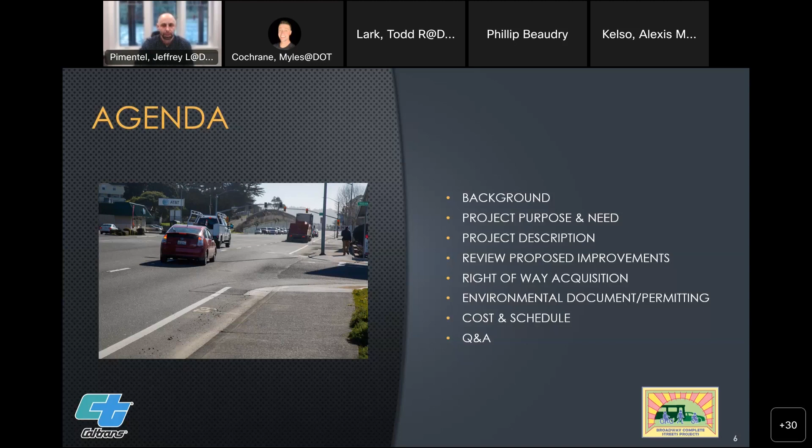In terms of background, back in early 2021, through a partnering effort with Humboldt County Association of Governments, City of Eureka, and Caltrans, a Eureka Broadway multimodal corridor plan was developed, and a number of concepts and ideas came out of that in terms of ways to enhance and increase multimodal connectivity, safety, reduce congestion, and create a sense of place in the City of Eureka. The improvements you're going to see here shortly as part of the South Broadway Complete Streets project are a byproduct that fell out of a lot of the ideas and concepts from that study.

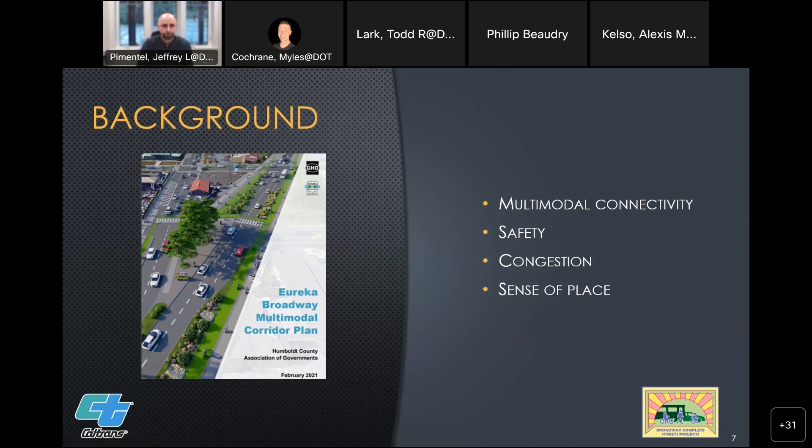With that, the project purpose: to increase pedestrian and bicyclist safety, connectivity, and level of comfort, and to improve accessibility and on-time performance of the transit facility.

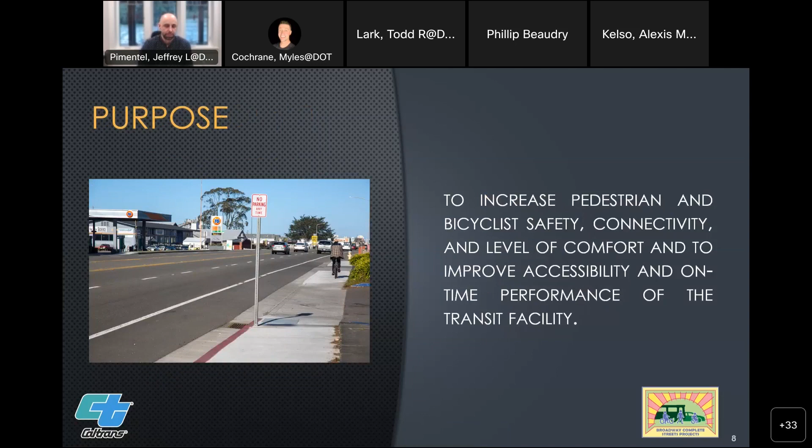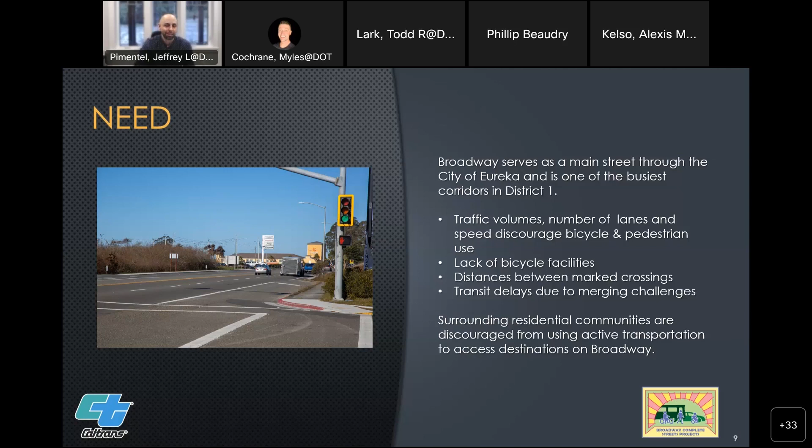Project need: Broadway serves as a main street through the city of Eureka, and it is one of our busiest corridors in District 1. Traffic volumes, the high number of lanes, and speed discourage bicycle and pedestrian use. There's a lack of bicycle facilities on Broadway. The distances between marked crossings is significant, and we have transit delays due to merging challenges for buses trying to re-enter traffic when they make stops to pick up or drop off passengers. Surrounding residential communities are discouraged from using active transportation to access destinations on Broadway as well.

In terms of our proposed improvements, here's a list, and as I mentioned earlier, we'll go into detail location by location. The proposed improvements we're looking at for the project would include Class 4 bikeways.

A Class 4 bikeway is defined as a bike lane with a physical, vertical separation between the traffic lane and the bike lane. This would include a 3-foot wide striped buffer area with a flexible bollard or channelizer providing that vertical separation, similar to the photo on the left side of the page.

We'll also include enhanced bike and pedestrian intersection markings to bring more awareness to those users for both bikes and peds on where they should be, as well as to bring attention to motorized traffic and vehicles on where to expect bikes and peds to be traveling and to look out for them.

We'll be reducing lane widths from 12 feet as they currently are today, proposing to reduce those to 11 feet. We are also proposing a traffic signal at Hilfiker Lane, which would provide additional crossing opportunities for peds and bikes.

We're looking at adding crossing markings at driveways, again to bring awareness both to the motorized and non-motorized user of the location of bikes across driveways.

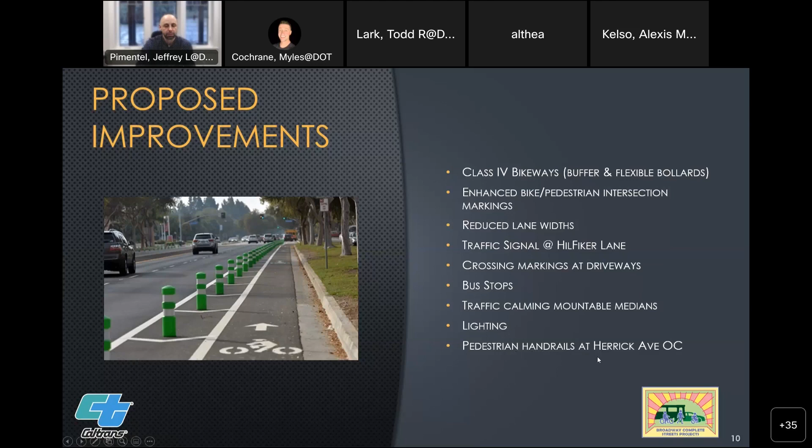So with that, I'd like to spend some time going through the project layouts and showing everyone location by location all the improvements that we just talked about.

First here, we start at the southern end of the project at the Herrick Avenue overcrossing. A number of these improvements are difficult to visualize just from a two-dimensional layout, so we tried to find example photos. The first time you'll see a type of improvement on these layouts, we'll show a picture. As we continue through the presentation, you'll notice we don't continue to carry these photos in all cases—we try to show them just the first time that improvement appears.

So with that, the Class 4 bikeway I mentioned—you've seen this photo already. We will start this at the ramps on the north side of the Herrick Avenue overcrossing, including that 3-foot buffer area with the vertical channelizer/bollards that would be installed.

You also see at the intersection at the end of the ramp, the bike crossing markings. We are proposing these at all driveways and intersections to bring awareness that cyclists are there. It also brings awareness to cyclists that that's where they should be traveling when crossing, making those movements at conflict points.

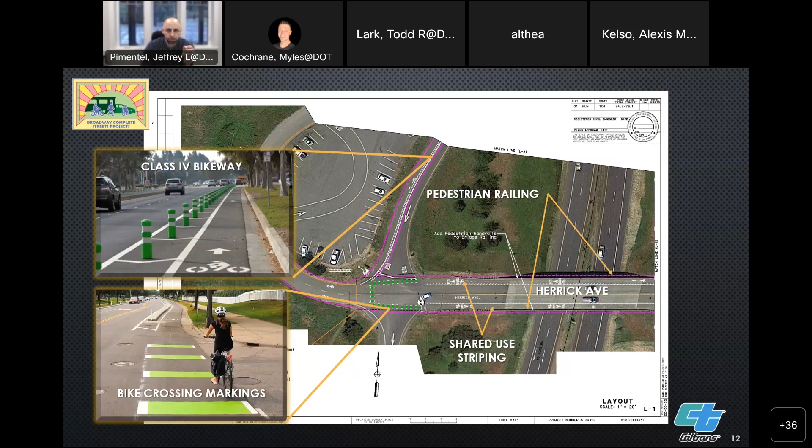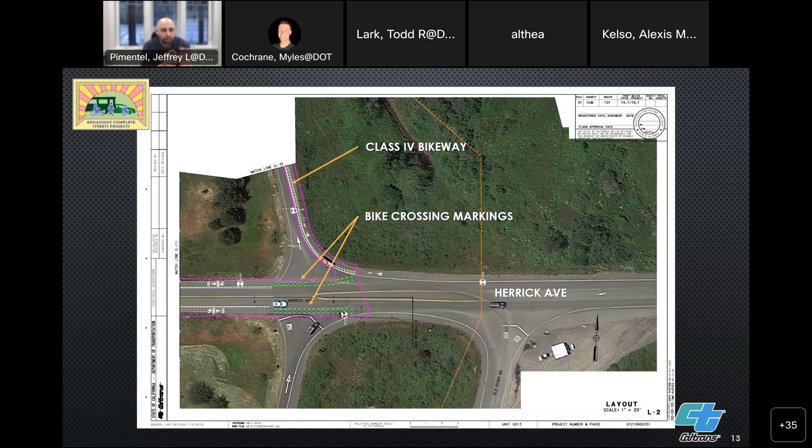Moving on, this is just the east side of the Herrick Avenue overcrossing. We'll also include the Class 4 bikeway as shown in the last slide, the bike crossing markings as well, and the extension of the shared use striping extending over to the intersection there.

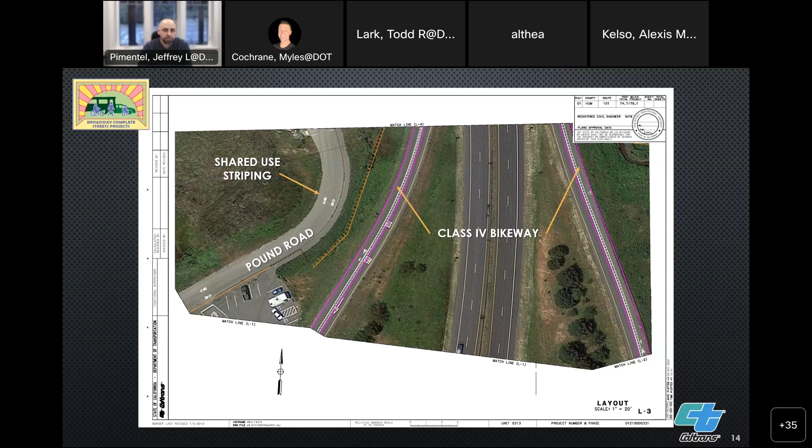Moving on further along, you see the continuation of the Class 4 bikeway onto the highway, and it continues into Eureka.

I want to make a side note here. For those who have followed this project from its conception, it formerly included a shared use path extending from Herrick Avenue over the Herrick Avenue Park and Ride to the Papa and Barkley intersection. Due to environmental impacts, namely wetland impacts, and the longer timeline to deliver that feature, it was decided to break that portion out and deliver it as a standalone project. This allows us to deliver all these improvements much sooner and deliver the shared use path on its own schedule. In collaborating with our stakeholders and team, we felt getting these improvements out as soon as possible was of utmost importance.

So you see the Class 4 bike lane on the highway. We'd expect that once the shared use path is installed, that would probably be the predominant way a bike or pedestrian would access the Park and Ride and Hikshari Trail.

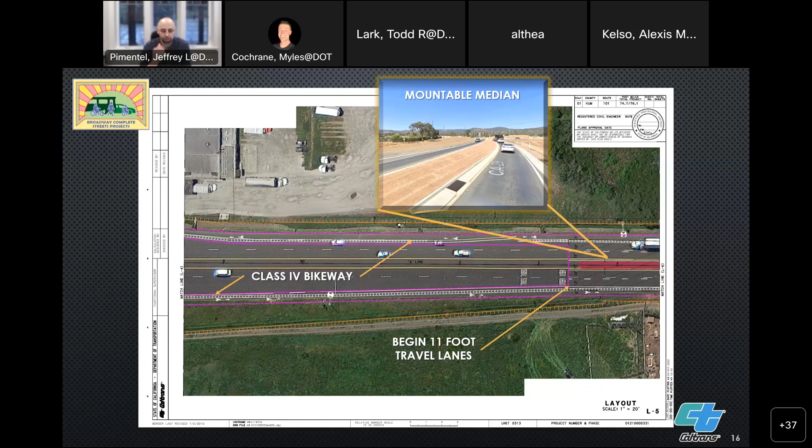Here you see the inclusion and beginning of a mountable median. This is really a traffic calming measure, starting here as you approach downtown Eureka. As we go further, you see driveways with driveway crossing markings similar to what you saw at the Herrick Avenue overcrossing intersections at the end of the ramps. These will be included at all intersections.

We also have a little portion of sidewalk infill below the image I'm showing, and the driveway that's pointing to that red shaded region where the sidewalk is located. There's no sidewalk there today, and we'd be filling that in.

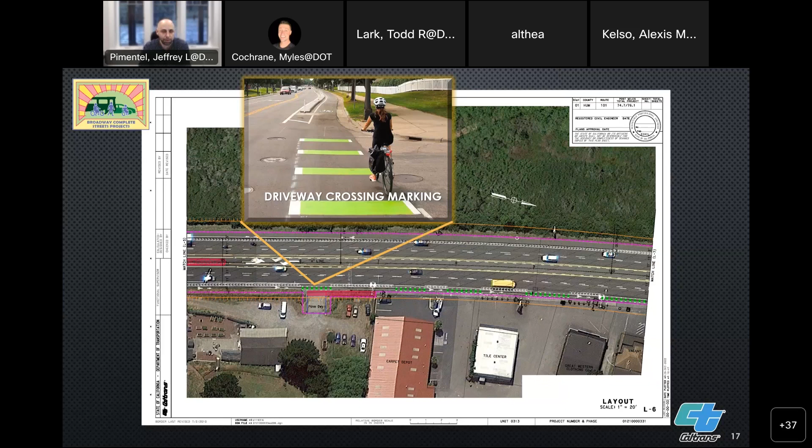Here we get to the Papa and Barkley intersection with 101 and Broadway. Through this stretch, we'd be eliminating the acceleration and deceleration lanes, both coming in and out of the Papa and Barkley business. Those would become more of a landscape median with the bike lane going behind that landscaped area, which would sit between the traveled way and the bicycles, giving more comfort and space from motorized users. You'll see in the intersection we have the enhanced bike and ped intersection markings.

We haven't installed any of these features to my knowledge in our district, so this is a first time and an exciting time to include these. All these photos you see are obviously not from Humboldt County or District 1, but nonetheless similar to what we propose to install.

So we have the green areas for the bikes, the white crossing striping for the pedestrians. We'll be replacing some of the ramps in those locations. The Papa and Barkley intersection currently has a right turn lane out and a left turn lane out of that intersection. We propose to make that one lane, with the right and left sharing that single lane.

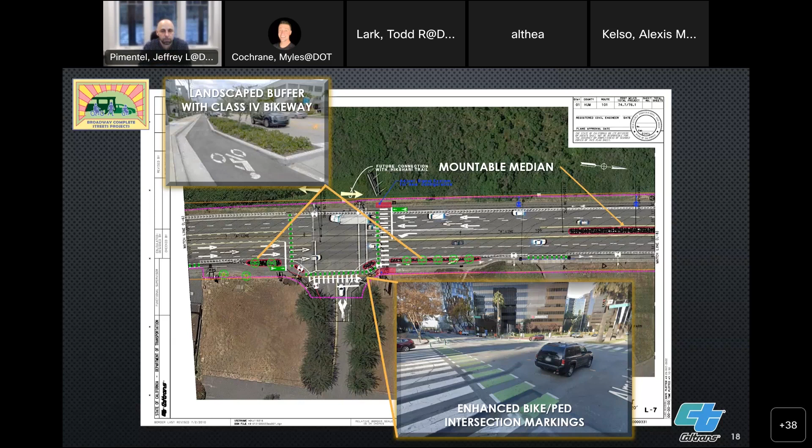As we come into Eureka here, we start getting into a more formal typical section of the highway. I wanted to show this to give everyone a sense of what the cross section and lane configuration would look like if you were to slice Broadway at any point from here to the end of the project, as proposed with this project.

The center two-way left turn lane currently varies between 12 and 14 feet throughout the project limits. We propose making that a uniform 12 feet throughout, so in some cases we'd be decreasing that width slightly. The travel lanes, two in each direction, would be reduced from 12 feet to 11 feet, as you see here.

You also see the bike lane in each direction with a 3-foot buffer area that's striped to prevent any movement, with the channelizer or bollard in the middle providing vertical separation between that outside travel lane and the bike lane. And then of course we have the sidewalk on the outside.

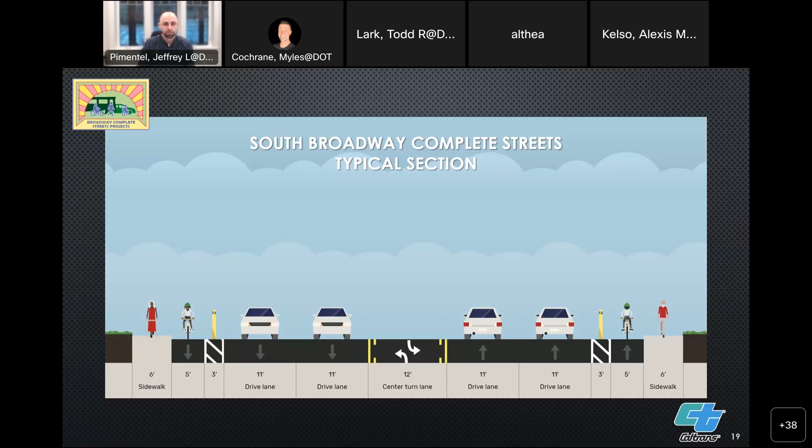Continuing in this northbound direction, you see the continuation of the Class 4 bikeway, the enhanced bike markings at the driveways. At that intersection to the right of the page, you also see the pedestrian marking included, since that is a formal pedestrian crossing.

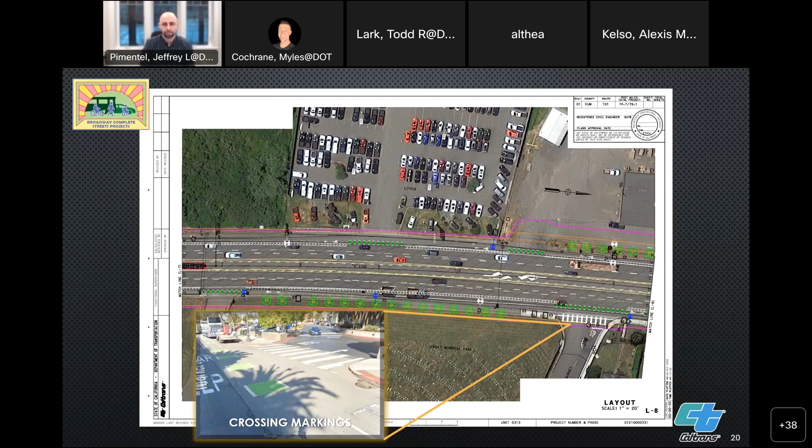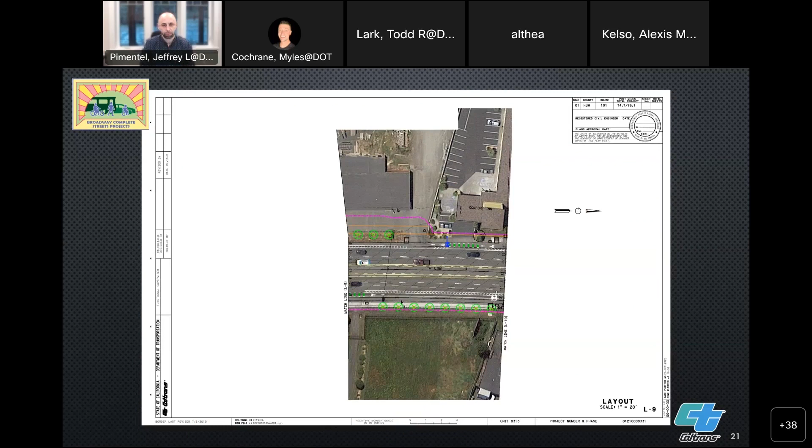You also have the enhanced pedestrian and bike markings at the intersection on all legs. The bus stop in the southbound direction on the Pierson side of Broadway would propose to eliminate the acceleration lane coming out of Pierson's and convert that to the bus stop. On the north side of the intersection, still on the Pierson side on the west side of the highway, we propose to eliminate the deceleration lane to enter Pierson's, converting that to a bike lane with a buffer area. Vehicles would then turn right into Pierson's from that outside lane, not the deceleration right turn lane that exists today.

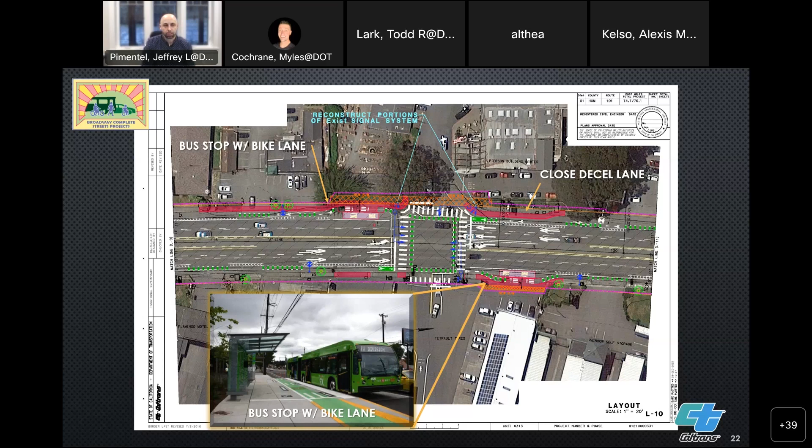On the Tetrault Tire side, we also have a bus stop proposed in the northbound direction, very similar. The bike lane would go around the bus stop, so the bus would be between the motorized traffic and the bike lane, similar to the photo shown. And I believe that's everything. You also see the enhanced markings at driveways, and some new sidewalk proposed to be installed there as well.

Moving on, much of the same there, that's in front of the Union 76 gas station.

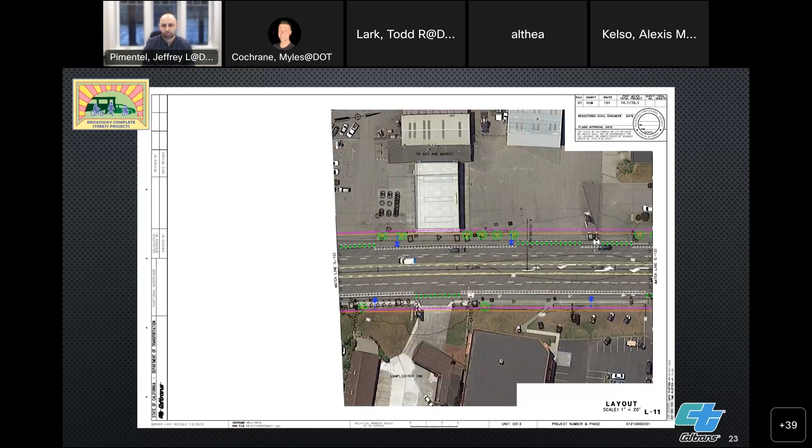And then as we approach the Hilfiker Lane intersection, we are proposing a new traffic signal. This would provide a new crossing opportunity, a protected signalized crossing for peds and bikes that breaks up the long distance between the two signals that exist both north and south of this intersection. We also have the enhanced markings for peds and bikes at the intersection and continuation of the Class 4 bikeway, the driveway markings, and here you see another mountable median on the north side of the Hilfiker Lane intersection.

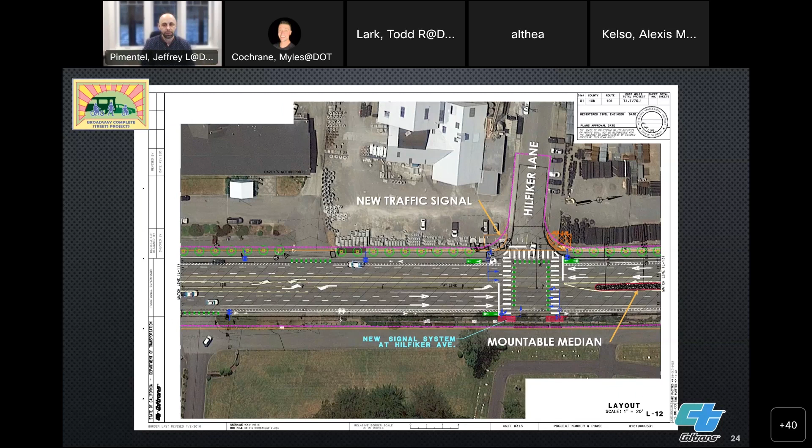Moving on, you can see the remaining portion of that mountable median, driveway markings, Class 4 bikeway. We get to Allard Avenue. There we include not only the bike markings, but because that is a local street, we also include the pedestrian marking there as well.

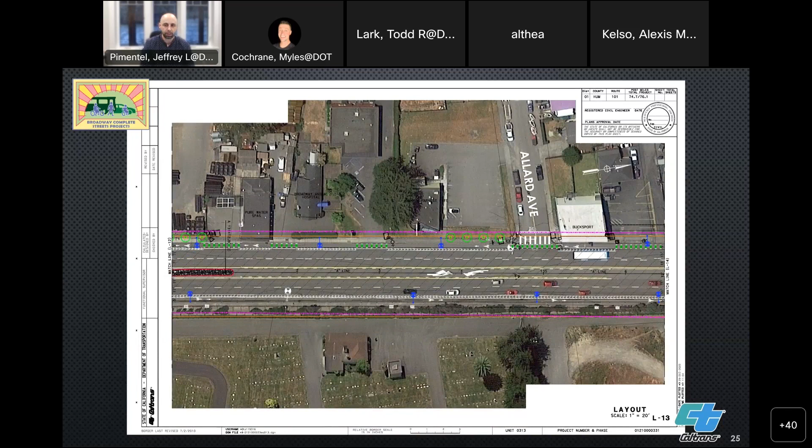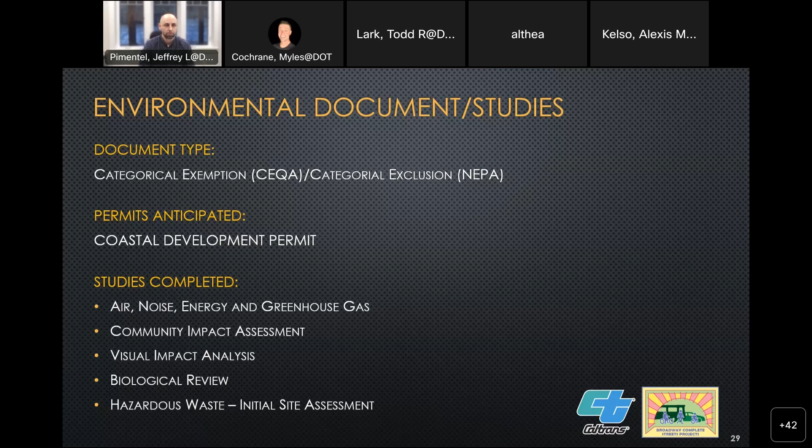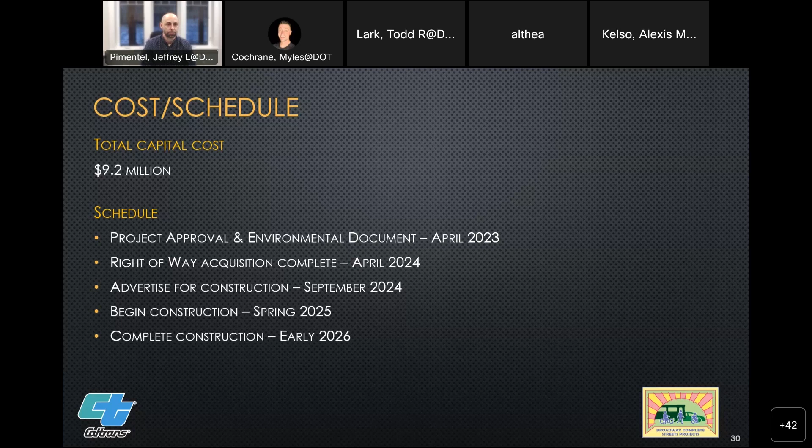You have a few ways to submit comments. You can send them via postal mail, snail mail, to California Department of Transportation, North Region Environmental, E1 branch, attention Carrie Williams, P.O. Box 3700, Eureka, California, 95502. We also have a project email set up, which is South Broadway Complete Streets at dot.ca.gov. Either of those are fine. Please just remember to send your comments no later than March 2nd, that would be much appreciated.

And with that, that concludes our presentation, and we'll go into a Q&A session for anyone that has any questions.

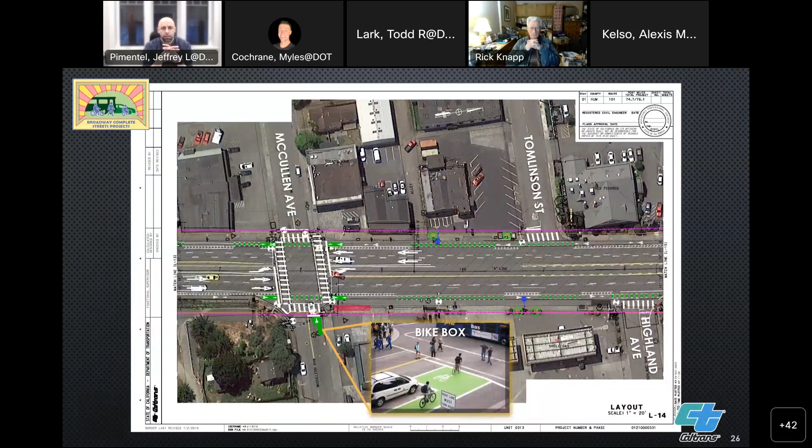So in terms of impacts to the Bayshore Mall, maybe we can bring that slide back here. We would no longer have the acceleration lane coming out of the mall if you were making a right turn out. We are proposing to combine the left and right lanes into one lane, mainly so trucks have more room to off-track and not pass their wheels over the sidewalk. But we don't expect any impacts as a result of that.

We do have enhanced markings through that area, so we'd expect safety to increase for pedestrians and bikes. I'd say the biggest change would be the acceleration lane coming out of the mall heading southbound would no longer be there for that use. It would be for buses.

I guess, Kate, if you had a follow-up to my response there, feel free to chime in with audio if you'd like, I'll give you a minute.

Hi, Jeff, thanks for that. This is Kate from Bayshore Mall. I see also that you are looking at having some area for mobilization and doing some sidewalk work in there. I am looking for clarification - we were talking about merging the two lanes together. Which two lanes are you speaking of there?

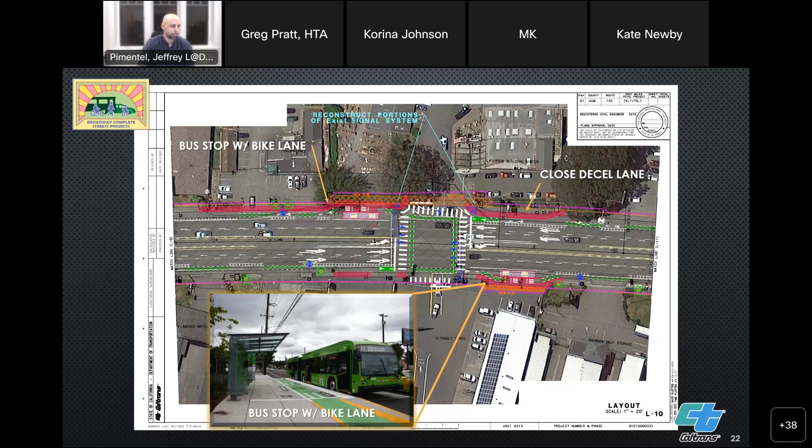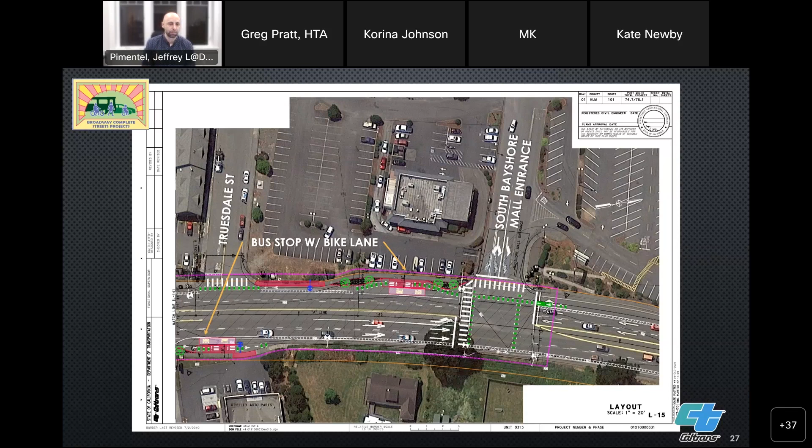I'll go down to that intersection. The proposal with the project is that people would use the formal South Bayshore Mall entrance as their crossing. We do have McCullen's - there were former proposals to add crossings across Broadway through those sections, but unfortunately it gets difficult with business access given the offset intersection of Truesdale and Highland. So the consensus was to have the signal at the South Bayshore Mall entrance and try to get crossings as close to that location as possible. That's where we'd be encouraging peds and bikes to cross formally.

Okay, because what I see - I live near Broadway and Hawthorne, that's the intersection I commute at. I think it's 350 feet to the closest crosswalk, and I see a lot of people making mid-block crossings across Broadway, since the crosswalk is that far, or they'd have to walk 350 feet in the wrong direction, cross the street, then walk 350 feet back to reach their destination. So I anticipate that being a pretty big problem.

Yeah, the real intention behind putting the bus stops nearest to a signal is that as people get off the bus, there's a formal crossing close by. Ideally the bus stop by O'Reilly's would be closer to the South Bayshore Mall entrance in that northbound direction, but unfortunately we have quite a grade difference between the area there and the land just to the east, with a large retaining wall, so there's really not an opportunity to put it there. So the furthest north opportunity is right in front of O'Reilly's for that reason.

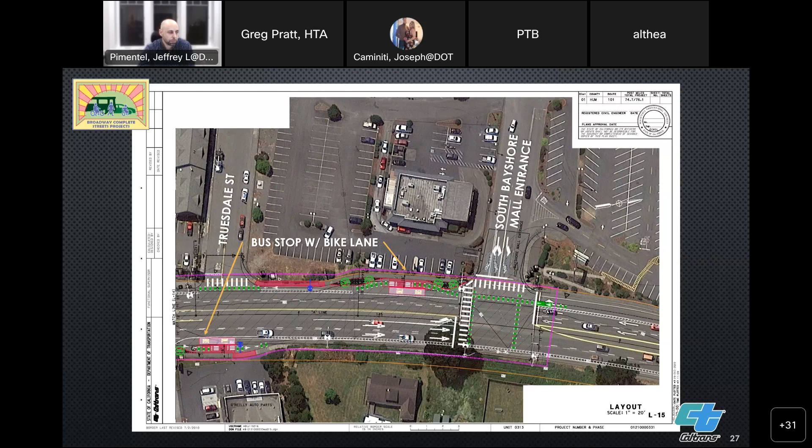Morgan says, I'm glad to see these measures in process, look forward to a continuation of measures along the rest of Broadway corridor in the hopefully not too distant future. So you make a good point. We do have other projects, such as a middle portion of the Broadway Complete Streets project that continues north from here.

We have a couple other projects currently going to construction. Just to give everyone a heads up, I was actually just at the HCOG board meeting before this at 4 o'clock, and I gave a presentation of all our projects - either recently constructed, ready to go to construction this year, and currently in development - from basically the south end of Eureka all the way to the north end of the Eureka Arcata corridor.

HCOG does record those meetings, so if you go on the HCOG website, I'm sure you'll find a recording of the board meeting that took place today, February 16th. There's probably about a 20-minute presentation I did earlier today covering all the improvements and plans we have for Broadway.

All right, let's see here. Morgan, you have another question. I'm glad to see these measures in process. Oh, never mind, for some reason it just gave me the same question.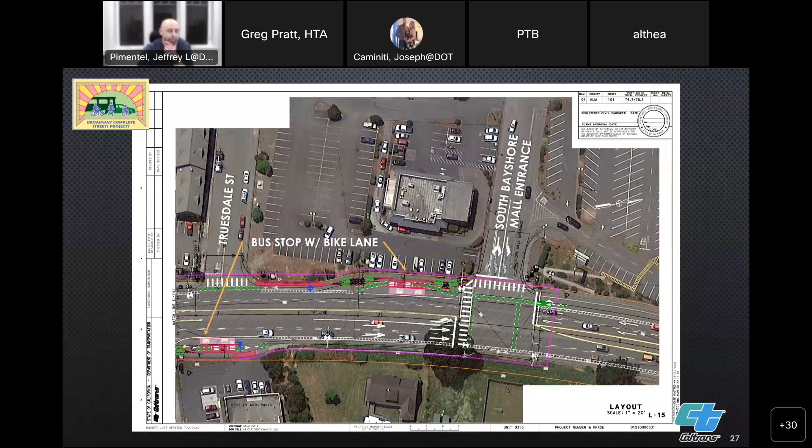We'll go back and discuss that. I have arguments on both sides, and I know you and others are part of our extension of the PDT and stakeholders on the project, so I'd encourage we talk about that. I wonder if having green bike lanes might take away from the green at the intersection, bringing less awareness to that, but I'm sure there are studies and information on that. So let's talk about that further. I'm sure individuals on our project development team have some insight as well, so I'd like to take that back to the team and get back to you. Rick, if you have any perspective and want to send a comment to elaborate, to the project email, I'd appreciate any insight and input you have.

Joseph, you were just clarifying what HCOG was.

Althea says, why are there no plans to have any kind of physical separation, even flex posts, on the Herrick overpass? A bicyclist was killed there a year ago. Everyone assumed he was a reckless cyclist until he was identified and turned out to be a retired Caltrans engineer. Althea, I will bring that back to the team. I don't have a great answer for you on why we don't have some sort of bollard or separation proposed there, but we'll take that back to the team and see if that makes sense and if something could be added.

Hey Jeff, I'm pretty sure it is a class 4 up there. Todd can correct me, but I think we are proposing posts up there. Yeah, I think we're proposing posts up there. And also Todd added the pedestrian fence there too, to help prevent people from falling off.